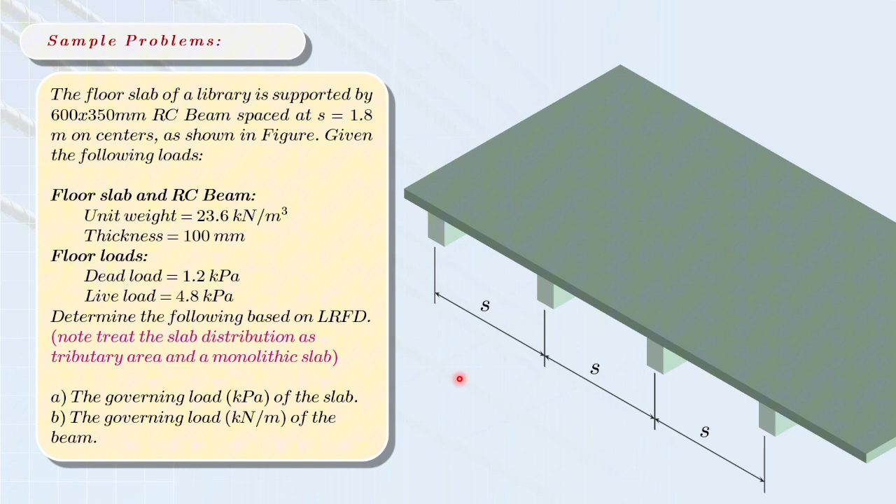So this is our floor system. As we already know from our figure, we have a slab and also an RC beam.

Now moving to the governing load of the beam, our load case here is simply dead load and live load. We'll use the second load combination, which I derived earlier, which is 1.2 dead load plus 1.6 live load.

So the first thing we'll get here is to repeat, the governing load on top of the slab. This means our answer here should be in terms of kilopascal.

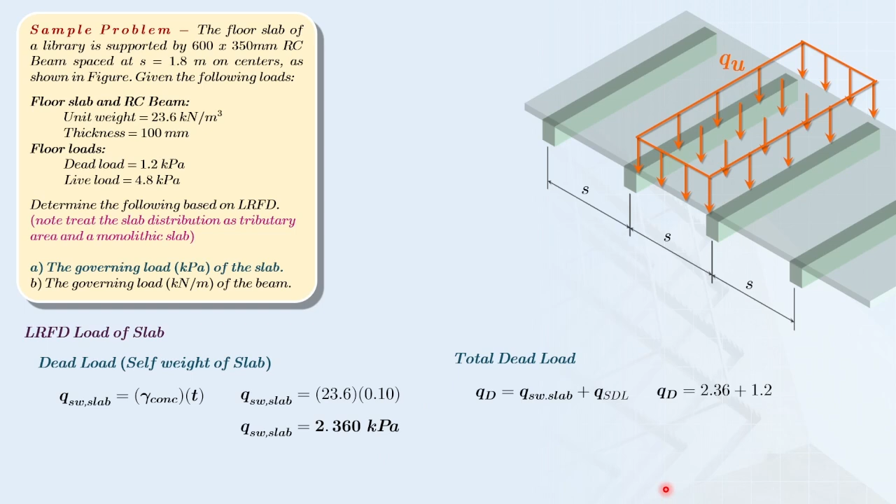So you superimpose dead load natin which is the 1.2 kilo Pascal. So let's add it up. Nakuha na rin natin dito yung self-weight, we need to add it. So we have 2.36 plus 1.2. Ang makukuha natin dito total dead load here which is 3.56 kilo Pascal.

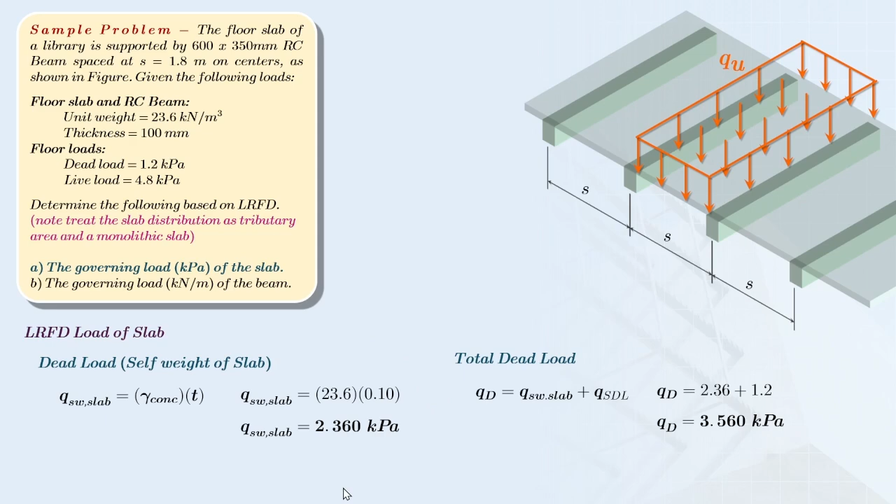Okay, ibig sabihin lang na to class, ang pinaka load case lang na binanggit sa problem is dead load and live load only. Pero we need to answer the first question which is the governing load. So when we are having the governing load, ibig sabihin we need to include yung ating code provision sa pagkuha ng ating governing load which is using section 203.3 and in conjunction with 203.3.1.

Same mechanics lang siya doon sa ating previous sample problem na kung saan using these 7 equations, we need to determine the most critical effects, or sa madaling salita, yung maximum value ng ating mga following load combinations.

Alright, so first let's compute the self-weight of the beam which is in terms of a uniform load. Kung kanina sa ating floor load under the slab, ang ginagawa lang natin dito para makuha mo in terms of kilopascal, minumultiply lang natin yung unit weight ng ating concrete sa kanyang thickness.

Kaya lang kapag slab ang pinag-uusapan natin. However, self-weight ng beam yung kailangan nating kunin. So instead of multiplying it sa kanyang thickness, or should I say in terms of height, we need to get this in terms of area.

Ibig sabihin, we need to multiply the unit weight of the concrete sa cross-sectional ng ating beam. Kaya lang considering a monolithic slab, ibig sabihin yung magiging height natin dito, which is the 0.6 or the 600 millimeters, you don't need to add the 100 millimeter of the thickness, kasi naka-integrate na po yung mismong slab natin doon sa beam natin. That's why our area here is now become 0.6 multiplied by 0.35.

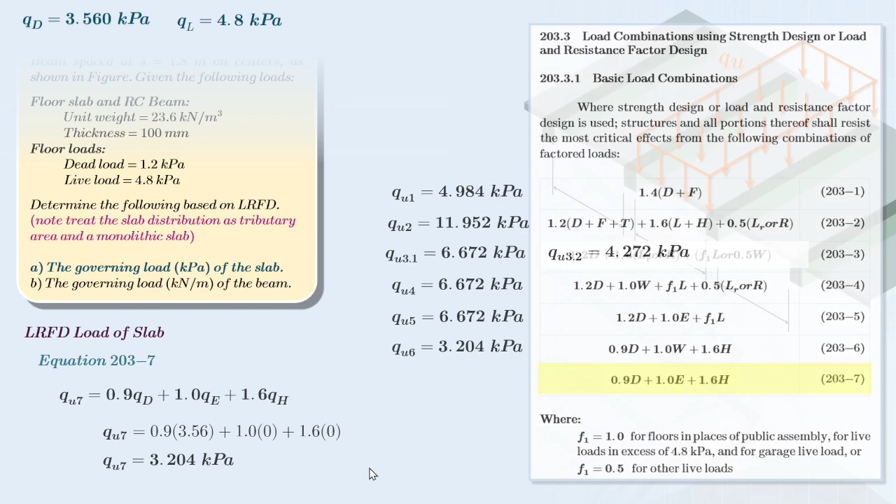Alright, so once again class, kung babasahin ulit natin ang ating provision, kailangan makuha natin dito yung most critical effects, or should I say, the largest value using this design method. So these are the presented ultimate floor loads na na-compute natin kanina. Ang ibig sabihin lang nito, class, ang pinaka mag-govern dito is the floor load under load combination number 2, which is equivalent lang nito is simply 11.952 kilopascal. Okay, but please take note kasi ang given lang natin dito for our load cases is only the dead load and live load.

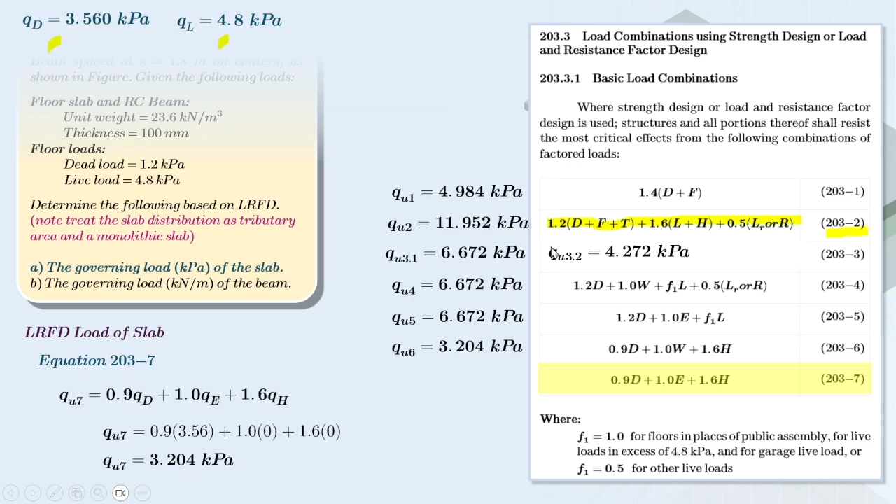Please take note, kapag yan lang yung given natin sa load case, ang gagamitin nyo lang dito, or in the simplified version for this one, is you can now use 1.2 dead load plus 1.6 live load, if yan lang ang given na load case. So ibig sabihin, yung equation number 2 natin earlier, which is this one, it can give us a guarantee na ito na yung magiging maximum load or the ultimate load kapag ang given lang is dead load and live load. So ibig sabihin, class, you don't need to proceed with the rest of the load combinations kung ito lang ang load cases mo. You may now directly use equation 203-2 to get the largest value among the load combinations natin. Okay, so this is our first part of our sample problem.

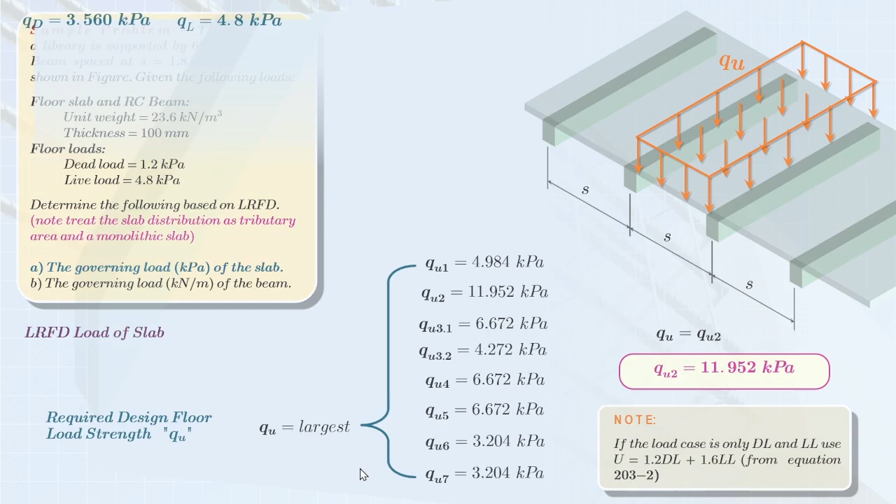So the next part of our sample problem, we already finished letter A. Let's proceed with question B.

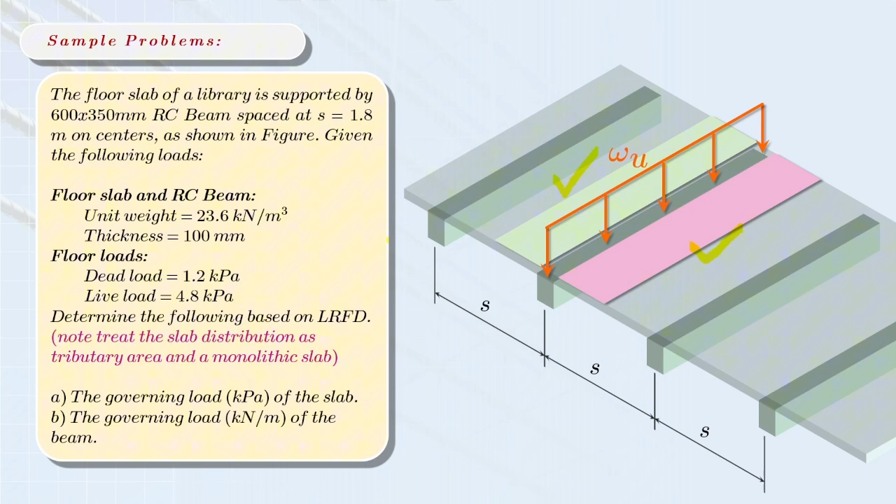So for example, on this sample beam, this is our target beam. What happens is whatever floor load comes from this slab and whatever floor load comes from the adjacent slab that is carried by our beam, we simply distribute them.

We need to divide it equally so it can be carried by our beam, so that it becomes a uniform distributed load, which is always in terms of kilonewton per meter. However, we were given a note that we need to treat this as a monolithic slab. So what does monolithic slab mean?

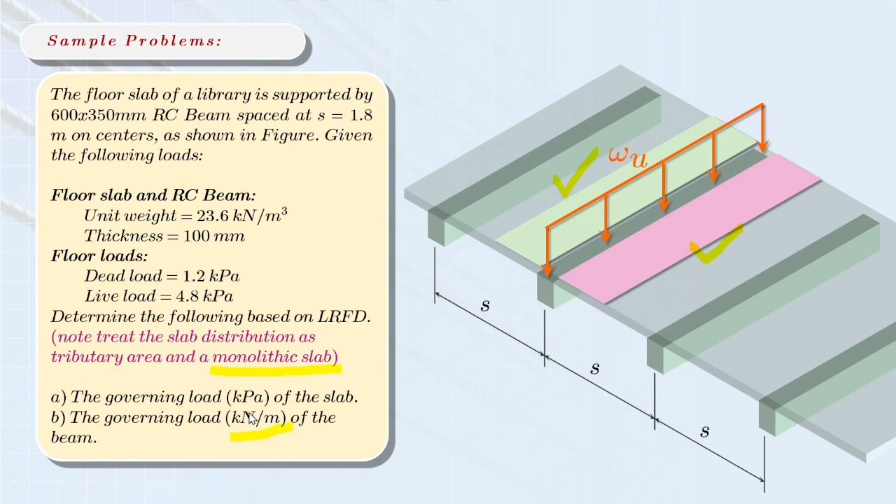I can present this using this diagram. When we say monolithic slab or non-monolithic slab, this is based on the setup, the relationship between our beam height and our slab thickness.

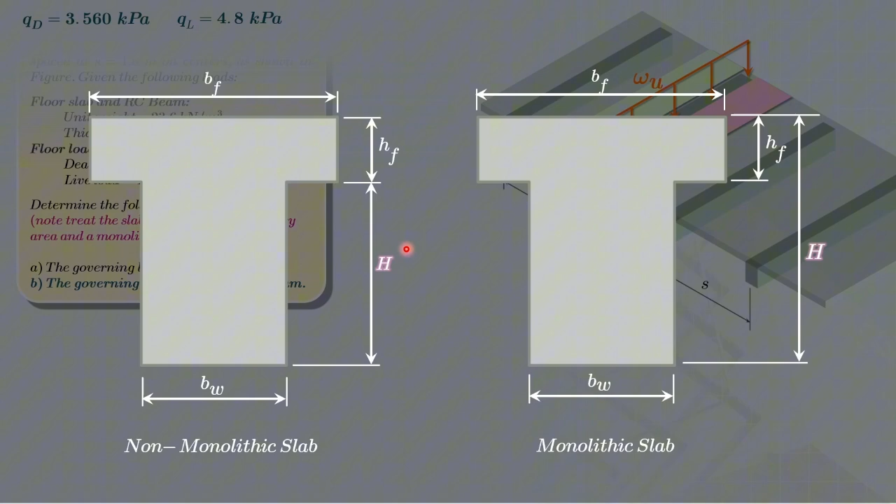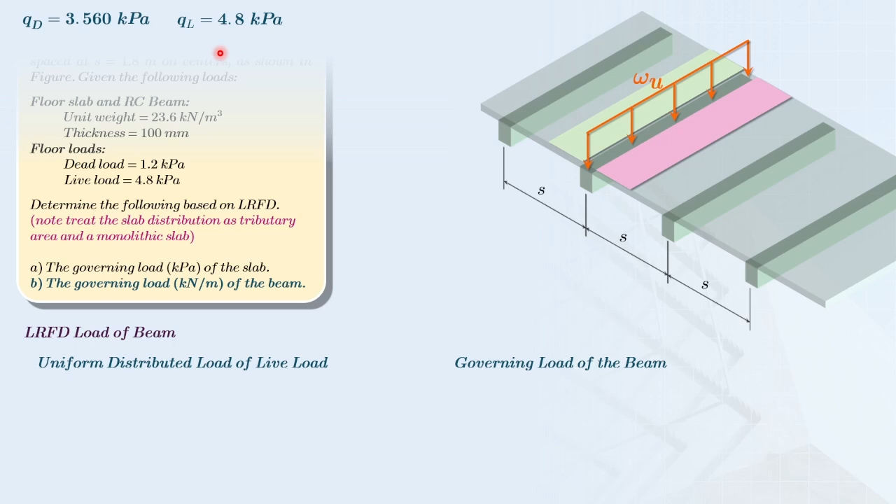So if we did this distribution from the slab under the dead load case, we do the same for the live load. Our live load given in the floor load is 4.8 kilopascal, so the same approach applies here.

What we need to do here is use the formula from the one-way slab, which is the same as the tributary area. So we have 4.8 multiplied by the center-to-center spacing, 1.8, divided by 2. That gives us the ultimate load of the beam from the slab, which we got earlier.

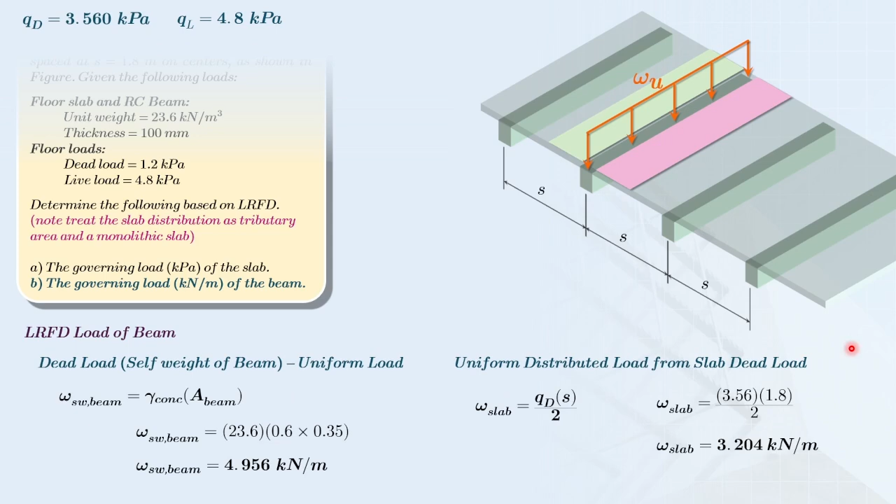However, when it comes to the monolithic slab, what happens is the pouring of our beam and slab happens together. In other words, they incorporate as one unit. This means our treatment of the beam is simply in this manner.

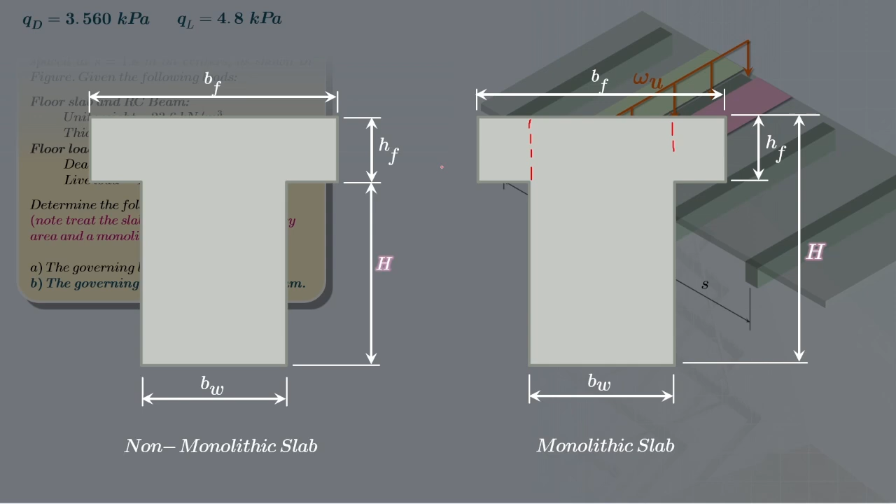This is the portion of our beam, where you can see this height. Then, under the non-monolithic slab, this is our beam, with our slab just resting on top of the beam. Meanwhile, in our monolithic slab, it's together, or counted as one unit, as you can see here in our figure.

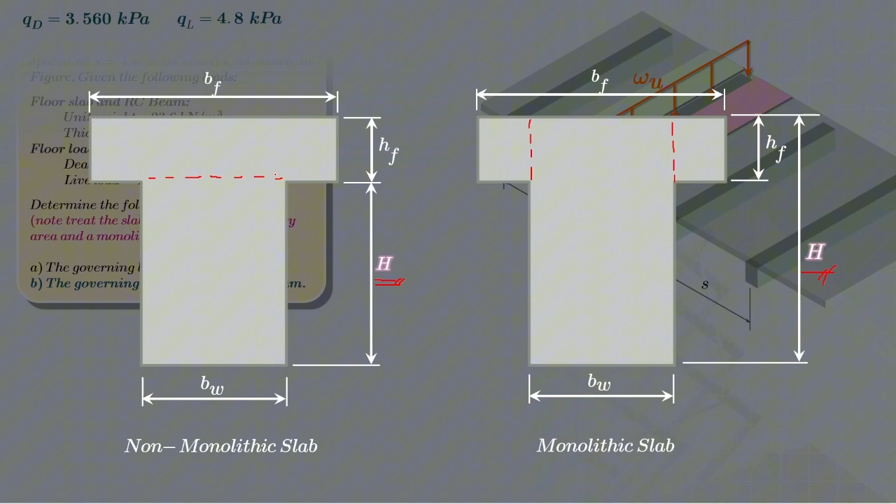Later on, we'll use this concept in solving the self-weight of the beam. What do we consider here? This portion? But of course, it was mentioned that this is a monolithic slab, meaning the height of our beam is not added to by the thickness of the slab, since it's already integrated as one unit or system.

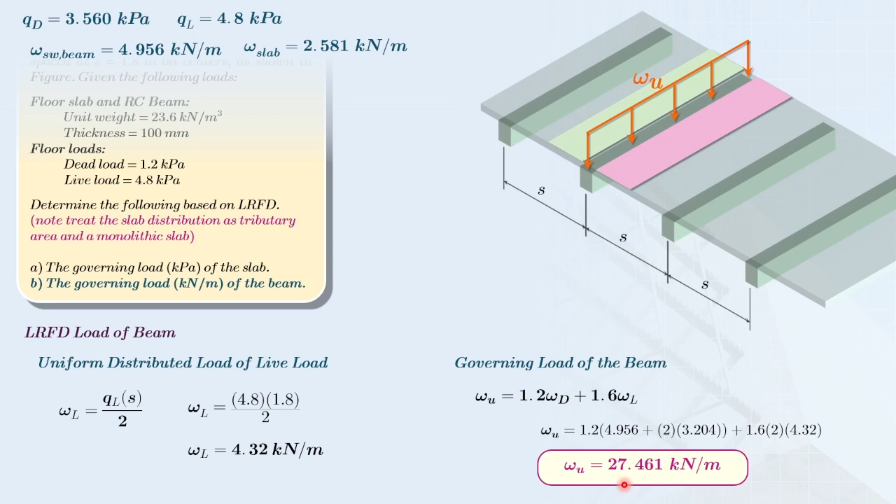So, following that, our ultimate uniform load is now equal to 27.461 kilonewton per meter. That's our answer for the second question. Thank you for watching.